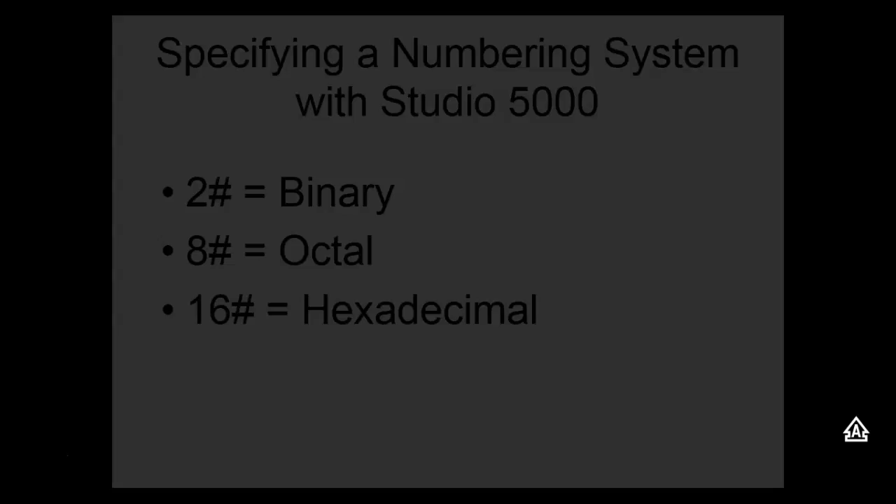We're using small integers, signed integers, these right here. So this is an 8-bit number, so that means we get ranges from minus 128 to 127.

We have integers, signed integers. So int is a signed integer. This is 16 bits, so we get numbers from minus 32,768 to 32,767.

And this is the guy right here. RSLogix 500 called it a long word, but this bit right here, this is a 32-bit signed number, which means we can represent signed numbers from minus 2,147,483,648 to the same number minus 1. And why do we have one less positive number than we got negative? 0 eats up one of your positive slots.

So this is what it stands for. And if you watch videos, they say that's a DINT, that's an INT, that's a SINT - that's what they're going to call it if you look at videos when they talk about these numbers. So by default, it's going to choose what you did.

Then we have real numbers. Real numbers are signed numbers. So this is a 32-bit number, but it uses exponents. So why do we get more right here? Well, these are exponents - you have so many of the bits. So bit 32 is the sign bit, then you have the whole number, and then you have the exponent that you raise that whole number up to. That's why we can get such big numbers with real numbers.

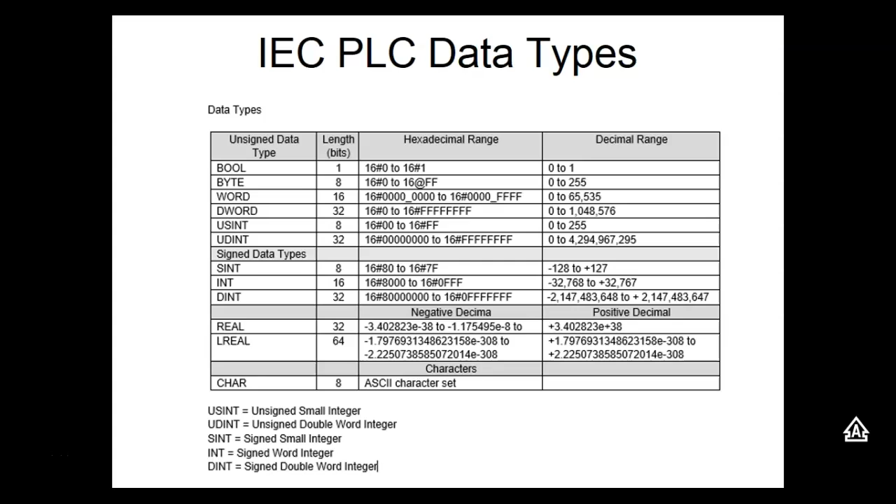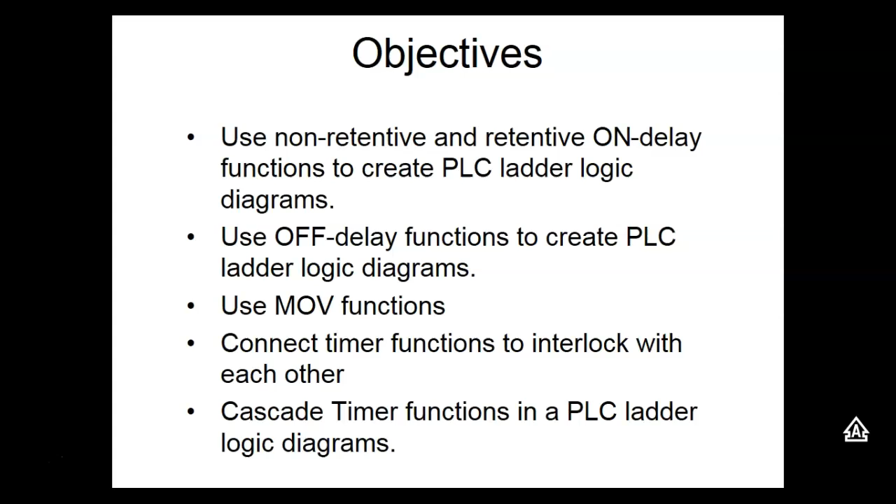So, timers. Use non-retentive and retentive on-delay timer functions to create PLC ladder diagrams. Use off-delay functions. So we're starting right where we left off in PLC 1. We're going to use a move instruction, interlocking timers, and cascade timers. Then we'll look at another thing too.

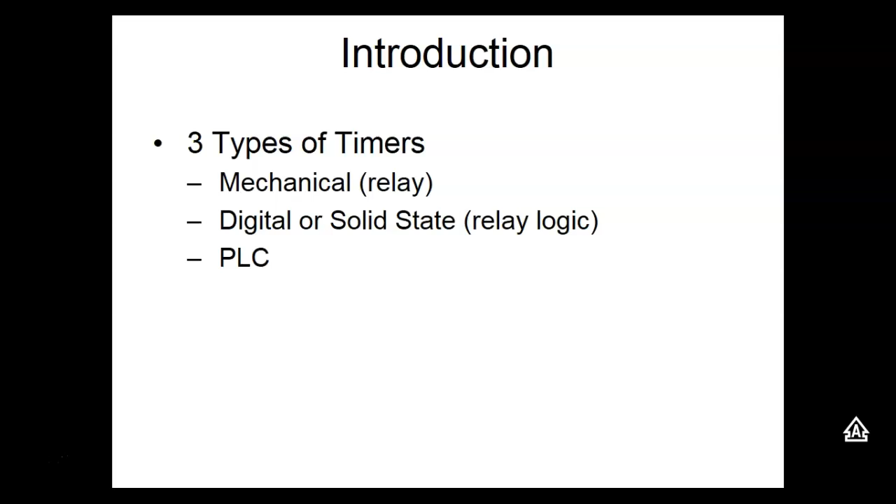So, in motor control, we have three types of timers. We have mechanical or relay timers, we have digital or solid state timers - these are relay logic - and in the PLC we have programs, right? You understand that? So these are some typical relay logic timers. This would be what we call a dash pot timer, because it actually has two diaphragms in there, and you control the flow of how fast it moves, the fluid from one side to the other.

It's usually got an adjustment right here where you set the time. So it's one of those things where if you want 5 seconds, you got to get a stopwatch out and adjust that screw until you get 5 seconds. So it's not like our PLC timer where we can do that.

Then we have the electronic timers. Normally you can set the time with a knob, but it's still not exactly accurate. And then we have programmable timers where you can make them off delay or on delay. I don't know if y'all played around with one of those in motor controls or not. I know you will in the sensor class.

So categories, we have on delay timers and off delay timers. Everybody okay there?

These are relay logic timers. In relay logic, the coil does not define the timer. The coil is just a coil. What defines what type of timer it is, is what contacts we use inside the relay logic.

So we're looking at which way the arrow points. If the arrow points towards the contact, it's an on delay timer. If it points away from it, it's an off delay timer. So this would be a normally open on delay, a normally closed on delay, and your on delay timers are just options.

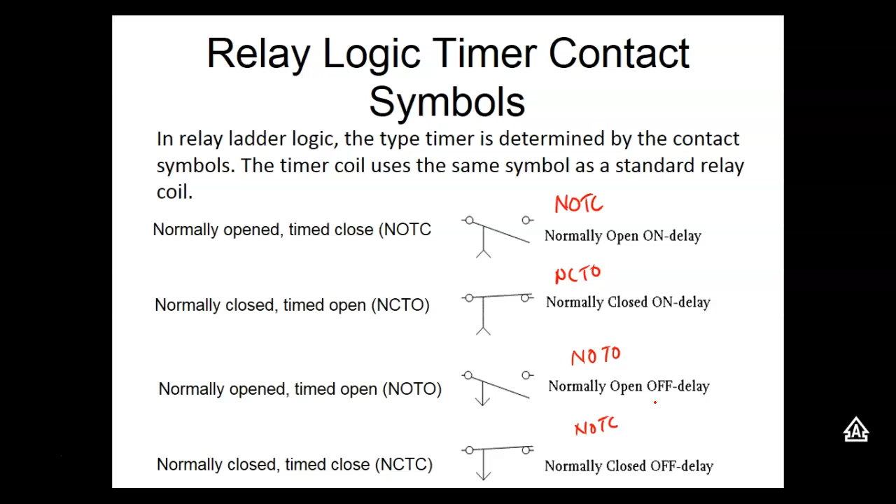And on your off delay timers, they're the same. So this would be normally open, timed open. This would be normally closed, timed closed. So these switch automatically, and then they change states after the time is out.

So this would be relay logic. We just use a coil symbol, and then we give it a name, and then of course we assign it. Normally you don't see 1 and 2 out there - the book does that too. We assign the contacts to the timer. Are we okay?

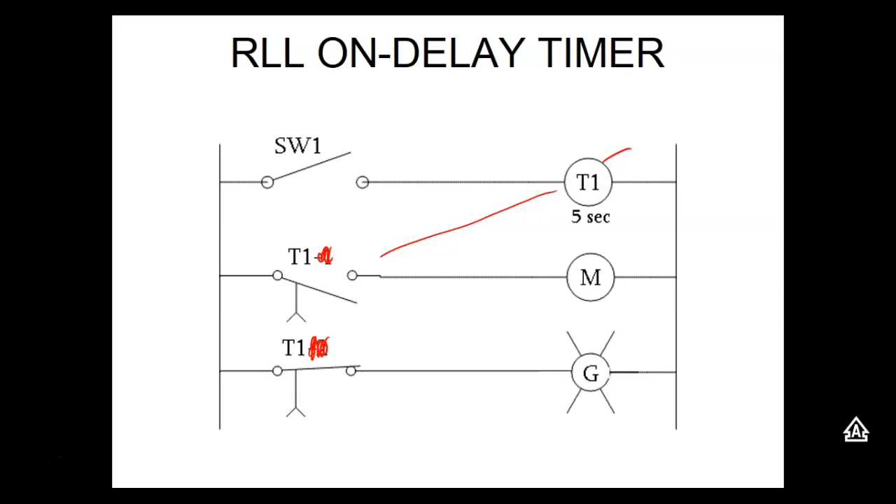Relay logic for an on delay timer. And then we have timer instructions.

So in relay logic, we draw coils, and the coils will be what actually causes the timer to change and move. And then we use those symbols to indicate whether it's an on delay timer or off delay timer. Okay, are we okay?

Same way, we would click on the symbol, right click, come up here, and right click right there, and it's going to say new tag. If you choose new tag, the type is going to be timer. If you set it up inside the tag chart, over there where I was changing mine from bin to bool, did y'all see what I was doing? You would come up here and you'd give it a timer.

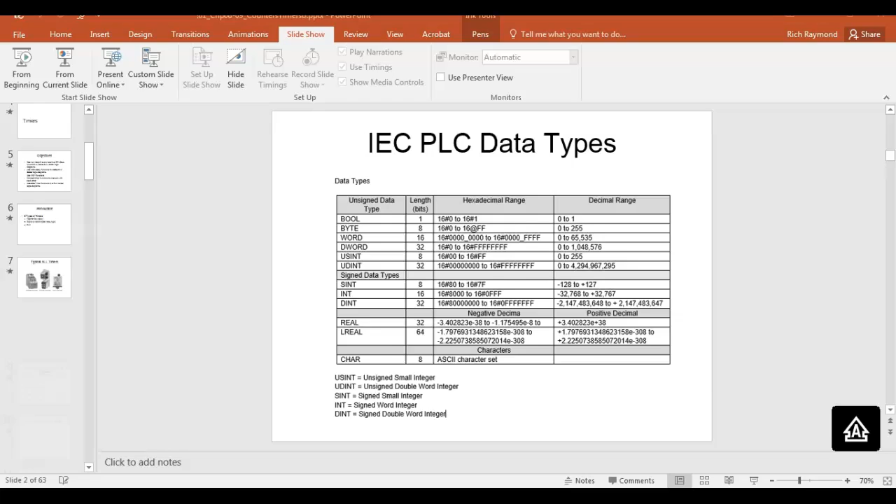I don't know, I think I closed mine out. I should have left mine open. So I'm going to open it up while it comes back, and then we'll open up wiring check 2, and then while it's opening up, I'll come back to my PowerPoint.

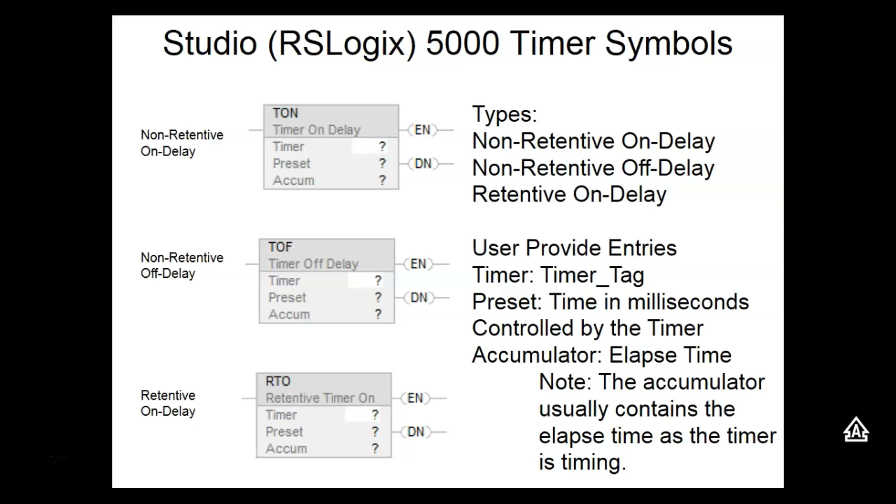Milliseconds, yeah, but once you start programming this thing and you get used to shifting it 3 ways, 10 seconds is 10,000. 5 seconds would be 5,000. And after you play around with it a little while, it becomes basically second nature to you.

So what we would do is over in my main program, my main routine, I'm going to come down here and add a rung. And then we'd put some type of control for our timer. Notice the groups are laid out across the top, so here's our palette.

So here's favorites, this is where you can put anything in there you want to, and I'll show you how to do that later on. Right now these are the defaults, which are the same defaults that we had in RSLogix 500. So we have new rung, down drop, examine if closed, examine if open, output energize, output unlatch, and output latch.

So my timers are here. Here's my time on, see that? What am I going to do now? Well, I'm going to have to give it a name. I'm going to come up here, right click on this, and say what?

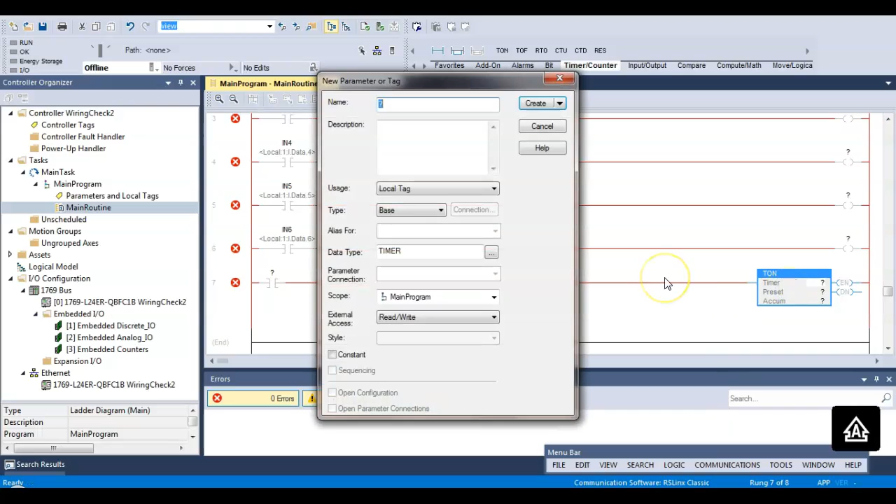New tag. Now what's nice about this is that if you go this route, it automatically chooses the data type for you. If you go over there, then you're going to have to choose that. It's a base tag because it's not referencing an input-output port. And then we give it a name.

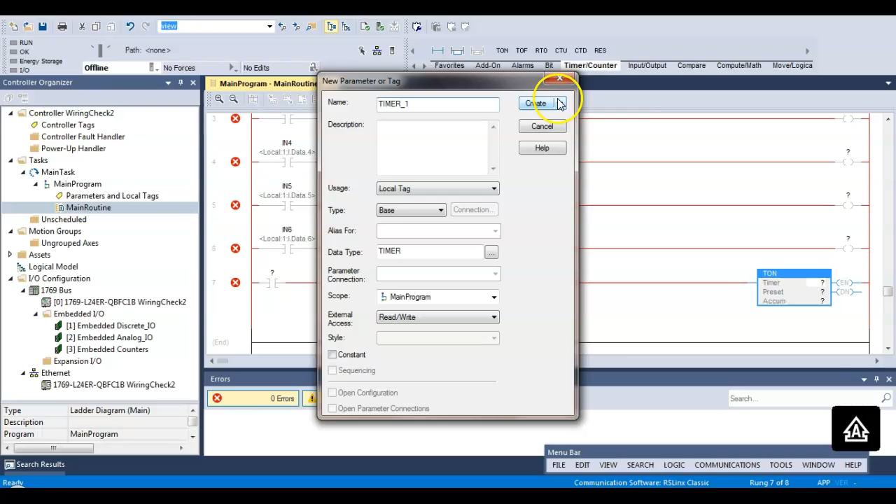By the way, this thing does not allow spaces, so notice when you hit the space bar, it automatically puts an underscore in there for you. Okay, so that's all there is. I'll come up here and say create. And then my timer's got a name.

Preset, we can put the value in there immediately. So if I wanted 10 seconds, I would have to put what? 10,000. Everybody okay? Any problem? Okay.

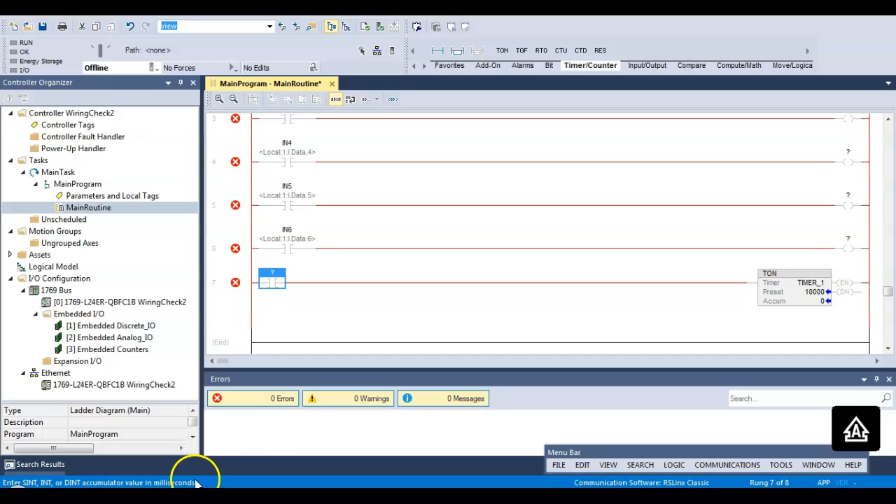Now, how do we address these bits over here? So I'm gonna come up here and add another line, and I'm gonna put a contact over here. So I'm gonna go back to favorites and slide this... okay, I did. So I want to address the done bit.

Well, I'll start typing timer, and it'll start popping it up. Timer_1. Now there's no such thing as slashes here, everything is dots. So I put a dot, and now automatically it gives me options. It says, are you going to address the preset? Well, I'm going to address the done. And that's all we have to do. So there's no slashes, everything's dots. We separate with dots.

In RSLogix 500, if you used a dot, you were talking about 16 bits. Over here, we're using names. So there's my done bit. If I wanted to address the enable bit, I'd use .EN. And if I wanted to address the timer timing, which is just like RSLogix 500, they don't show you that bit that's available to you, but I would come over here and use timer timing.

So I'd come over here and do what? Instead of using that, I would use TT. It lets me do it. Yeah, there we go.

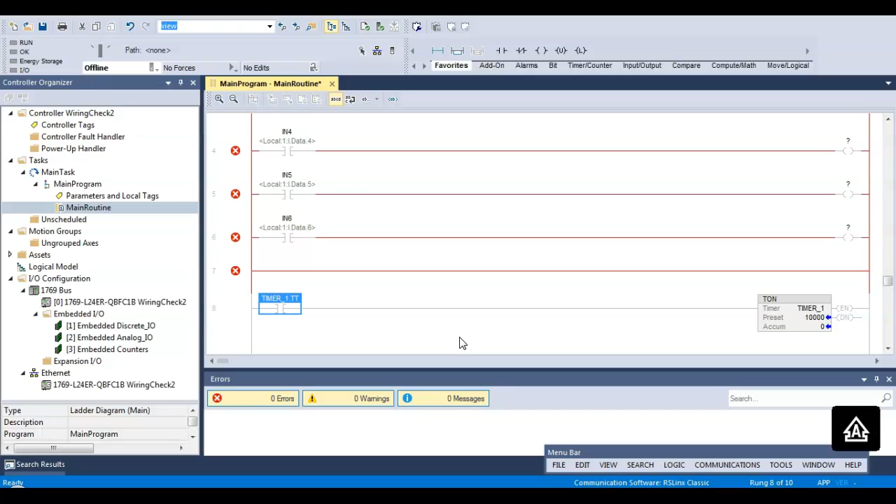Timer timing. So that's the big difference. So it's a lot cleaner. What's nice is that it's using the memory for one time. By default, it's a 32-bit signed number. But if you get up in the billions on your time, so I don't think we'll have any problems, but we can't go above the range that's available to us. Same way for off delay timers, same way for retentive on delay timers.

What's the difference with a retentive on delay timer? It has to be what? Reset. So there's our reset. If I go over to timers, there's our reset instruction right there. So it's exactly the same. You pull it down and you would give it the same name. So if I was going to use a retentive timer, see, ain't that neat? You see what I did? I went up in the title bar and just gave it that 3-letter acronym. I guess they're more mnemonics than acronyms.

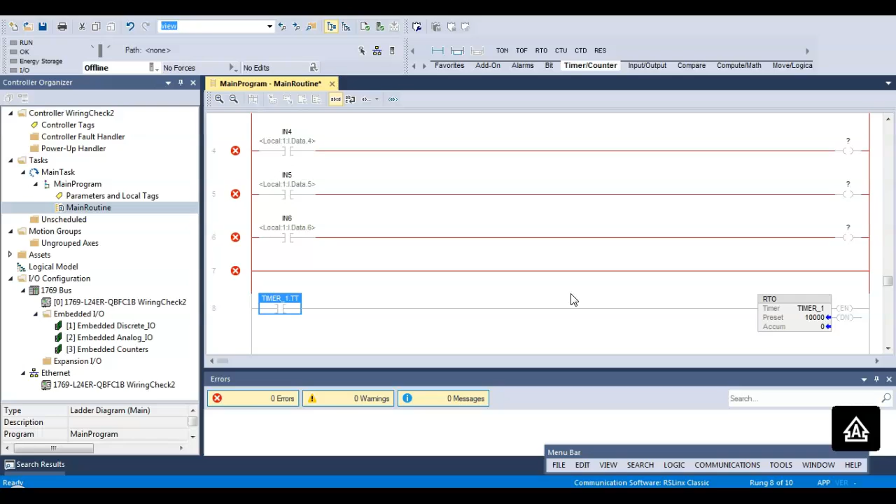We can change it over. And then I would have to come down here and put something that reset the timer. And then over here, I would come into my timers. I pull down reset. And what do we want to reset? We want to reset timer 1. So all I have to do is give it the same name. No, I didn't give it the same name. That's all we do. So as soon as we do that, that's all there is to it.

So now we're dealing strictly with names. This is why in PLC 1 I required y'all to use symbols, to get ready for this. And what's nice is here we deal mostly with tags. We call them tags, they don't call them symbols. But this would be what we call a base tag. So what's the difference between an alias tag and a base tag? Yeah, you're right. So that IN6 is an alias. This is the base tag right here. When we tie a name to a base tag, which is our inputs and outputs, those are called alias tags.

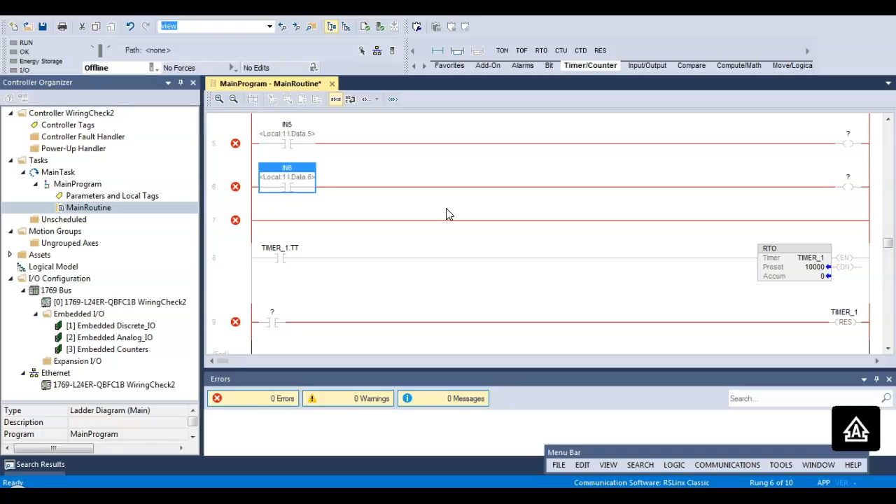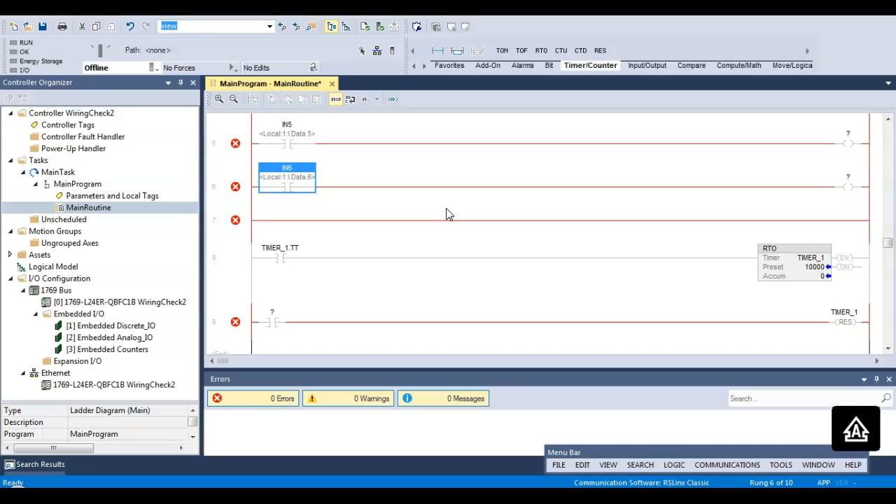So that's timers, guys. Very easy, especially from what we learned from RSLogix 500. You can come directly into this. The only thing you need to know to go to 5000 is what? We don't have to worry about time base, right? Our preset is in milliseconds, and we don't do T4, we just assign it a name. One way we can do it on the fly is right click, and the very top one says Edit Tag. So if I screwed up, I could come back up here and rename that tag. Y'all see that?

Okay, so timers. Any questions on that? Very similar. In fact, it's easier. It looks way more simple than RSLogix. The problem is, RSLogix was okay as long as you used a multiplier of 1. But if you wanted to get those fractional seconds with that time base, you had to do it in here. It's just milliseconds, guys, and that should be second nature to a technician. We teach that back in Intro to Engineering. Normally we wouldn't have 10,000 milliseconds because that's not legal engineering notation, but that's the way it works.

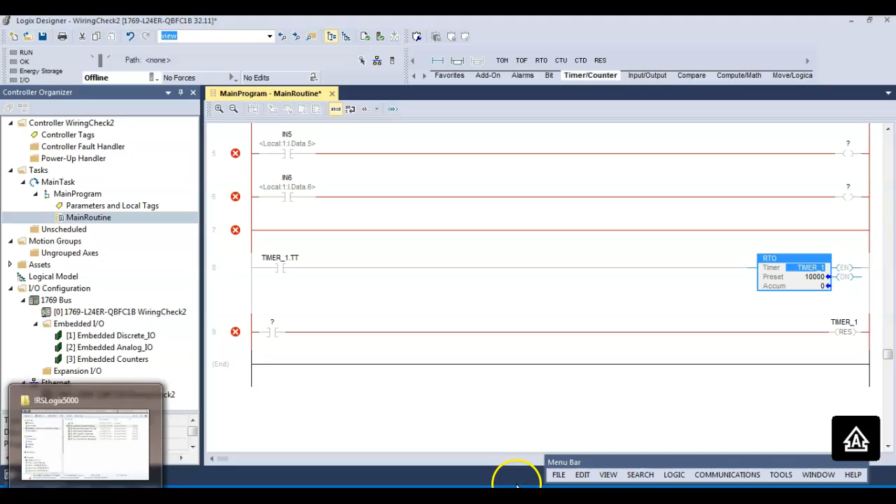So pretty easy. So counters. What about counters? This doesn't have that number thing you got to do, right? We'll see. We'll program one and actually see it.

No C5s, right. We just call it, and you don't have to call it counter one. These tags can be pretty big, so what you need to do is use a tag that basically defines what that timer or that counter does, right? Then when you come back and look at your program, you don't have to figure it out. If you call it timer 1, it's just what? Timer 1. But if it's timing this, then it would make a lot more sense.

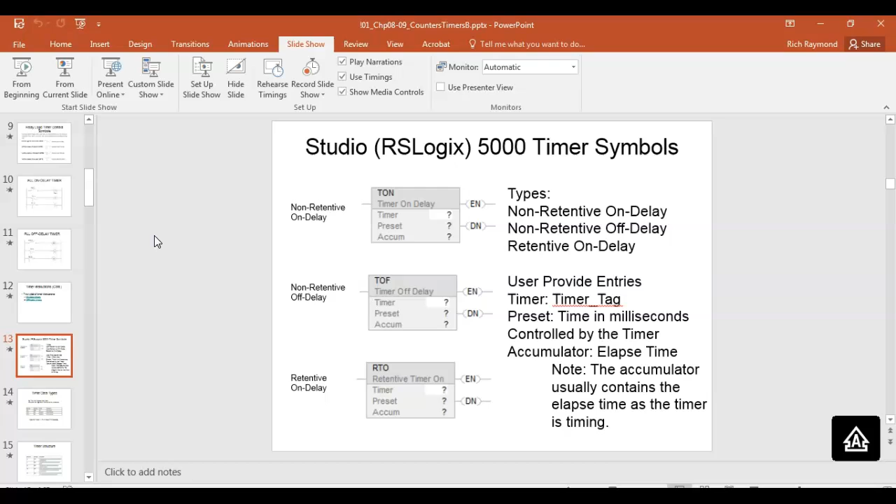But every time, in tags we can't put spaces in there, but it already takes care of that for you. What did it do? It automatically put that underscore in there. In fact, I've seen sometimes they just hit the underscore. So the timer has got to be a what? Now I'm going to check on this.

So we got three addressing modes. Whatever the instruction works on is referred to as an operand. The instruction itself is the operational code. It came from machine language programming. So if it says immediate, that means you enter the number in, just like I did. This came right out of the book, by the way. It says we cannot use any other addressing mode for the preset except immediate addressing. But I don't think that's right. I'll have to go back and read.

So what is immediate addressing? It means that's the number. That 10,000, since I entered that number in that preset register, that was immediate addressing. Immediate means you actually put the operand in the instruction itself. Direct addressing or tag addressing means you get the operand from somewhere else. We assign it a tag, and the tag is kept in the tag table, right? I'm almost sure, I'll check this out and see if we can use tag addressing on this.

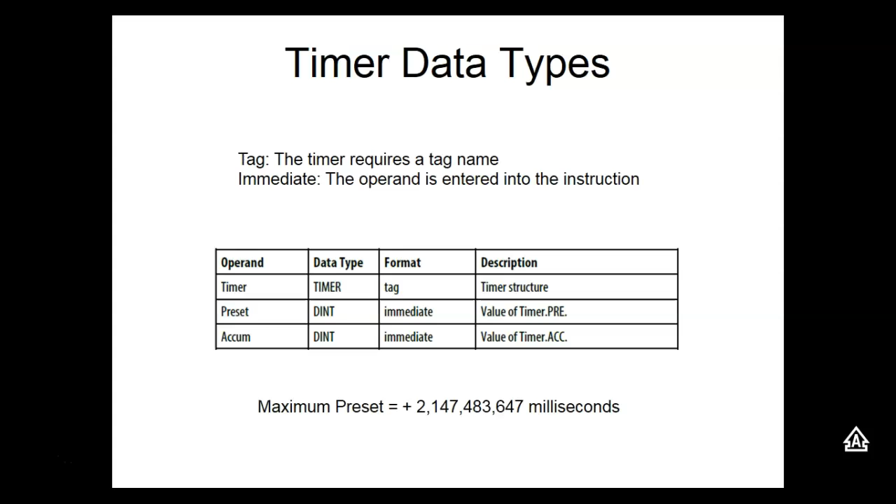So maximum preset is what? 2,147,483,647 milliseconds. That's a lot of milliseconds, isn't it? And what if you needed more time than that? You'd let the done bit on this one do what? Start the next one. That's exactly right.

Here's how we address these things. We put the tag. These are Boolean, single bits. We put the tag .EN if I want to get the enable bit. I put the tag name .TT if I want to get the timing bit. I put the tag name .DN if I want to get the done bit. The preset is a DINT, right? I would just use tag name .PRE, or tag name .ACC if I wanted to access these, not registers, these files, or memory locations. Are we okay here?

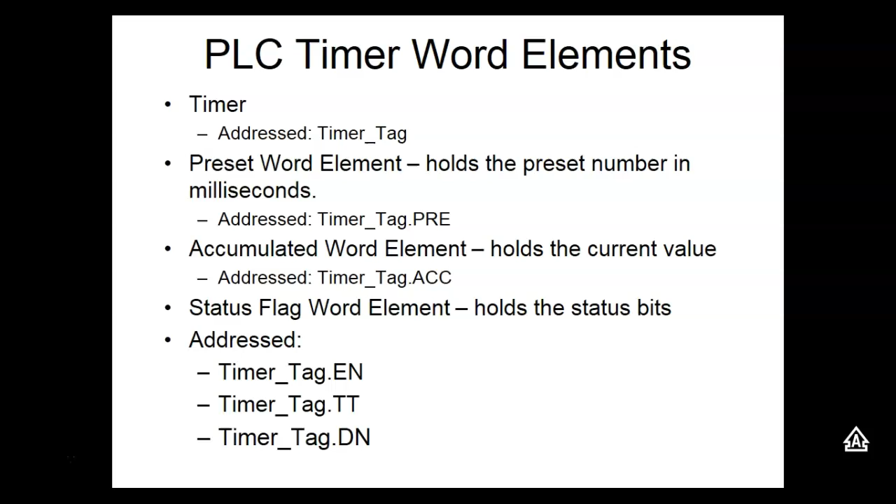So you don't have to worry about when do I use a slash, when do I use a dot, right? Everything is a dot. Well, no, it's not the alias, it's the base tag. None of these are pointing to an IO address. So timer tag is going to be that base tag, where it's local data. So when I put that tag in, that is a base tag. This is an alias.

So an alias points us to an IO port. Everything else is going to be a base tag. Everything. So timer 1 is a base tag. We don't point this to anything else, right? Does that make sense? Good question. That's something very important that we understand. Go ahead. Yeah, a counter's going to use base tag.

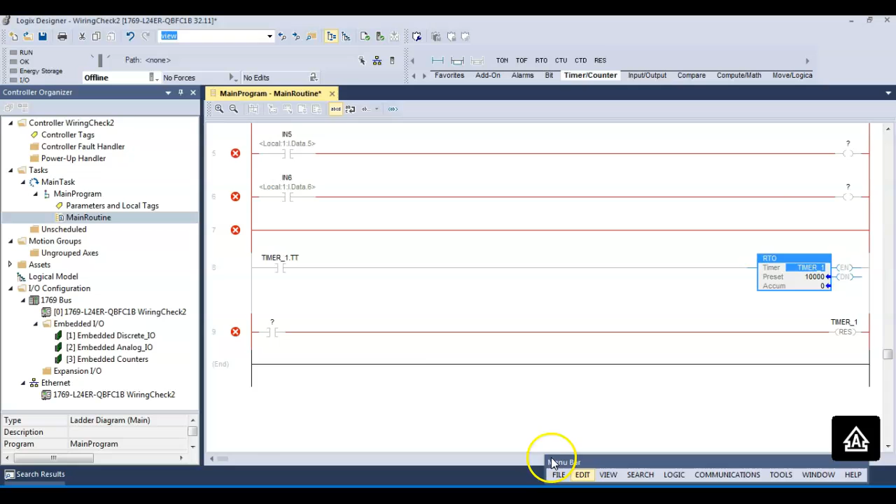Notice when I chose timer, I didn't change base tag down there. So if I'm going to put a counter, the only timer we have to reset is the what? The retentive timer. All your counters you have to reset, just like on the RSLogix 500. I need to finish my program so I can download. Okay, reset. So we'll get rid of it.

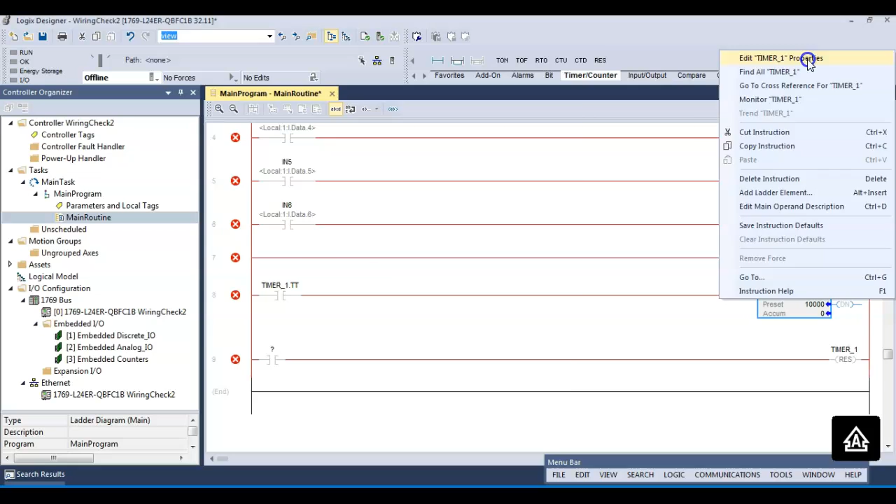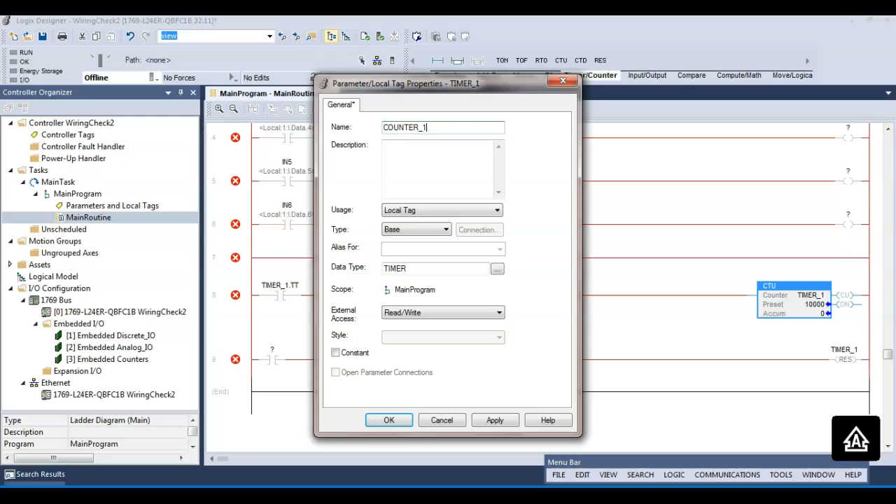So I'm going to come up here and change this to count up. And we'll add it. See the tag? We'll type it in. Base. I'm changing this over to a counter, but it's got all the information I used in there before. So I'm going to change my data type over to a counter.

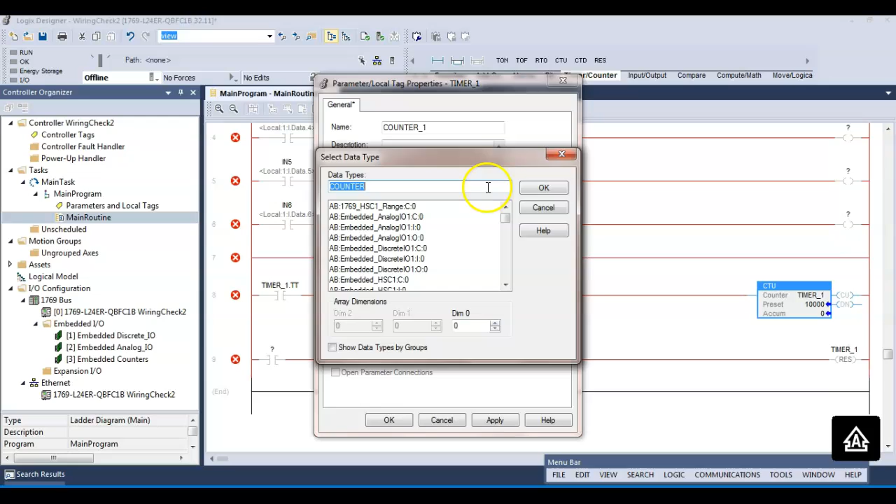By the way, this is the list of all the data types we have. We're not going to get into all of these. If you know what data type it is, timers are going to be a timer data type, you can just start typing it in. You don't have to go through that big long list.

Okay. So now we got an up counter. You'll see how I changed that instruction. It's pretty neat, right? Preset. What are we going to hold in the preset? No, this is a counter. What's our goal? What are we counting to? Right. This is the counter. So what are we counting to?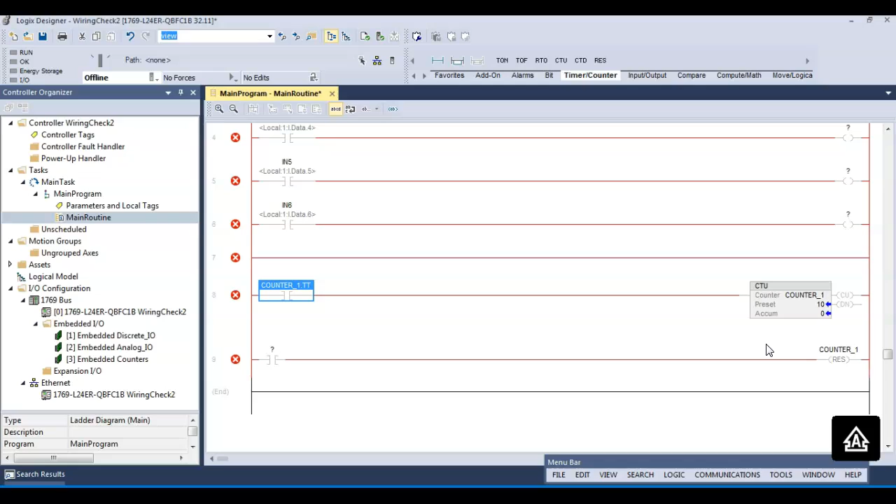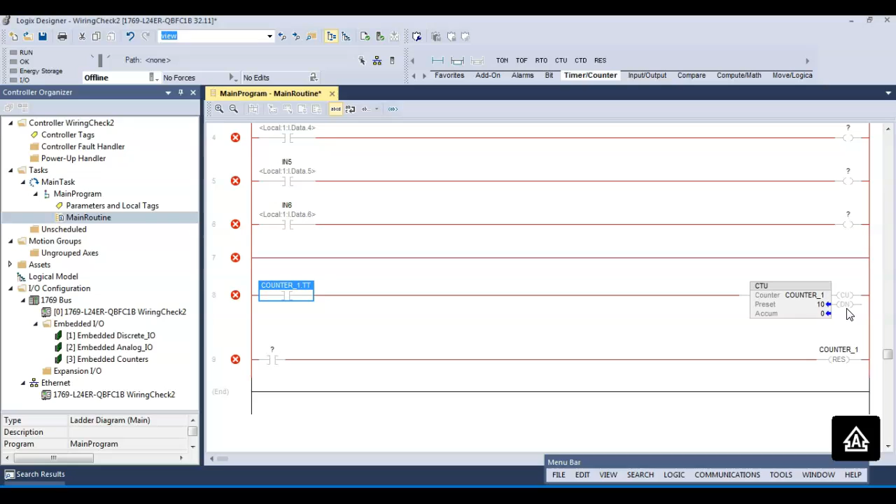We got 2 bits available to us. We have the CU, that's the counter enabled. So as soon as this goes true, every time it goes true, then the counter, so this will pulse with the count, right? And then we have a counter done that tells us when it's through. What happens if we keep counting after it's done? It just keeps counting, right? So what do we have to do to clear out the accumulator? Reset it. Or clear it, by the way. I'm going to show you another instruction.

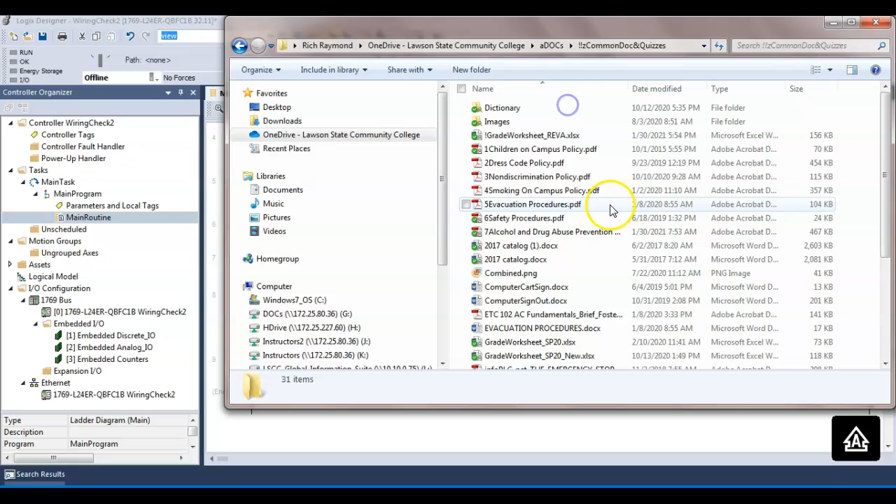So we have an up counter, we have a down counter. By the way, this is the document. So it's up there. And if you want information, I'm here to help you. But what I want you to try to do is look it up in that document, because when you get out there on your own, I'm not going to be there, right? You understand? So if you can come up here and understand this, then this is going to be a step up. So this is on the website, by the way.

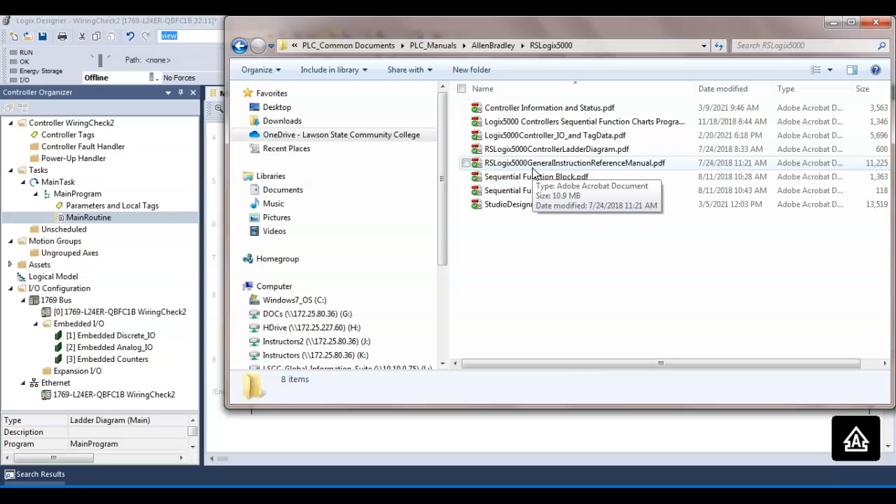So it's called the RS Logix 5000 General Instruction Manual. It's a PDF. You can download this for free if you just type that in there. It's a PDF file.

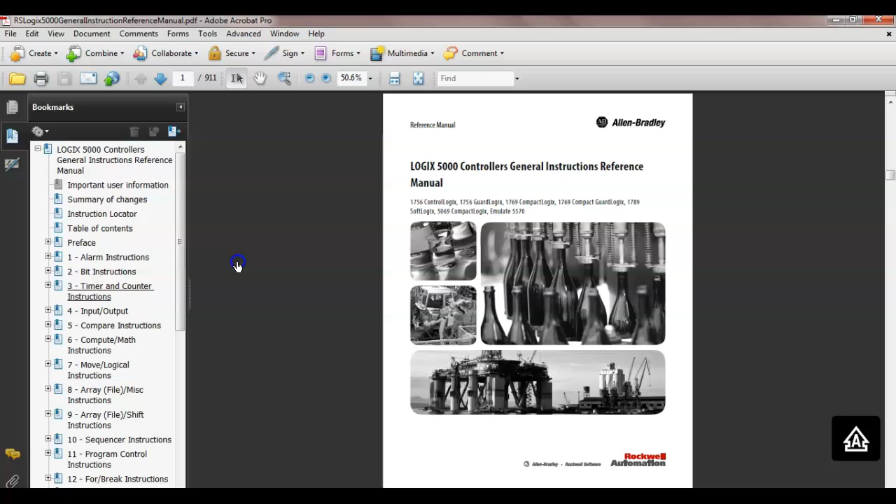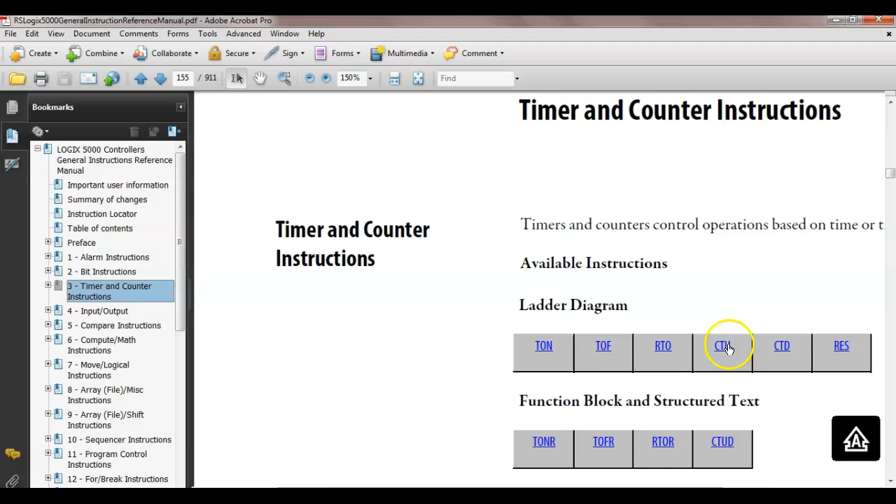It gives us a list over here, so I'm going to go down here to counters. Now here. I'm going to come up here and blow this up quite a bit. By the way, it gives you all the function block diagrams too. This is ladder, so we have an on delay timer, an off delay timer, a retentive timer, count up, count down, and there's our reset. So if you wanted to read what these instructions do, they're all linked. So I can come up here, and it'll take you directly to that section only.

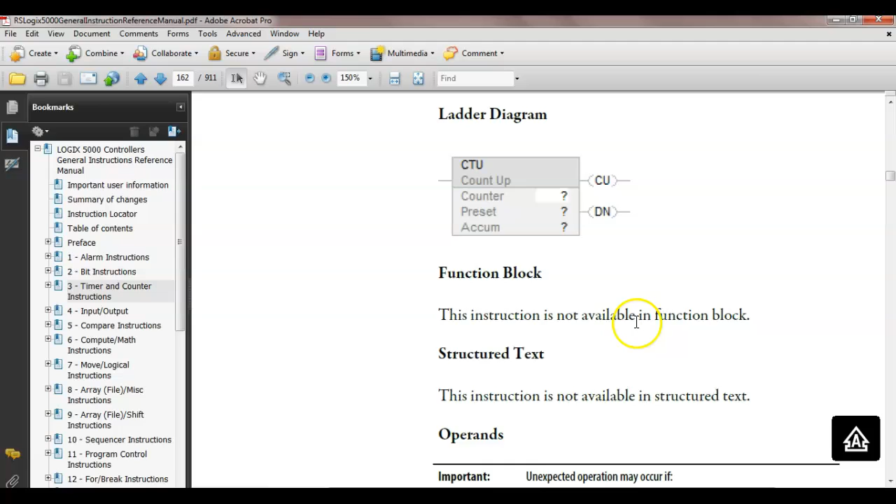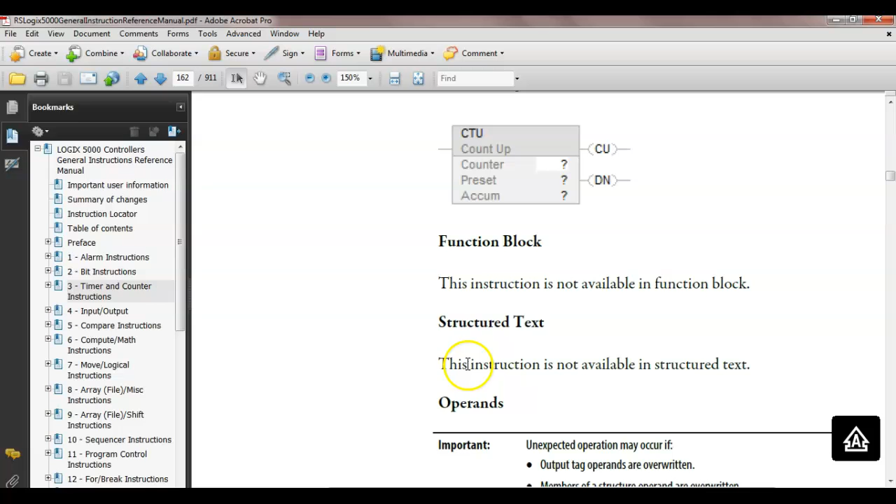So this is up counter. So this is not available in what? Yeah, so you would have to come up and figure out the code for that. And it's not available in structured text. It is available in ladder. It tells us that our counter is going to be a tag. It's going to be a base tag. It tells us our preset is going to be a DINT. It's a 32-bit signed number, right?

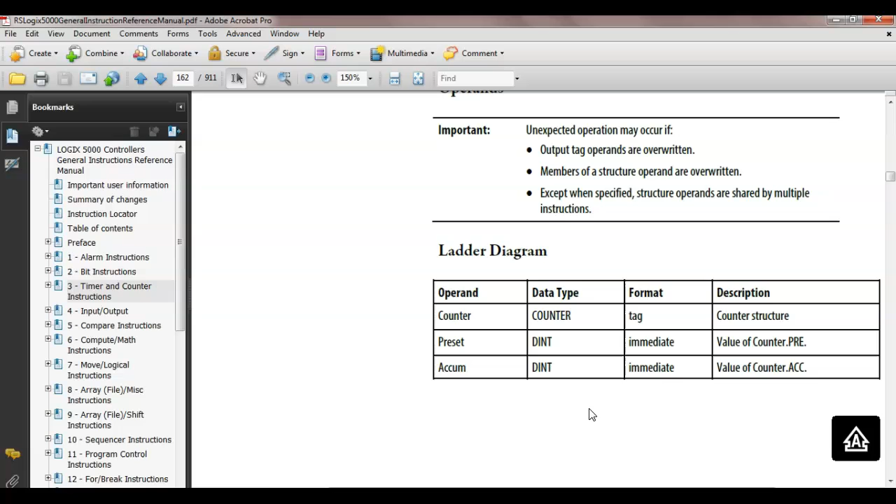It says immediate address. It says counter name, what? Dot preset. And our accumulator, we can come up here. It says immediate address. And this is going to be the number. That's going to be true. And then accumulator. Are we okay there? Any questions on that? It says this is all that's available to us.

So counter name .CU, that would be the count up, anytime the counter is enabled. Counter name .DN, that would be our done bit. Counter name .OV, that would be our overflow. What do we mean by overflow? It means we've exceeded that 2 billion number. If you try to make your counter go past that much, and I can't imagine anybody that would do that, this would go true.

And of course, if that went true, then probably what would you do? Enable another counter, right? And let it start counting from there. So that's the only way you cascade them. Here you would start the other counter if it had an overflow. That makes sense? Yeah, so you'd say, as soon as the overflow went true, you'd stop this counter, and then you'd start another counter. And then you'd have an instruction where you just added both of them together, right? Of course, you'd have to use a real number on that, because you already overflowed the signed number.

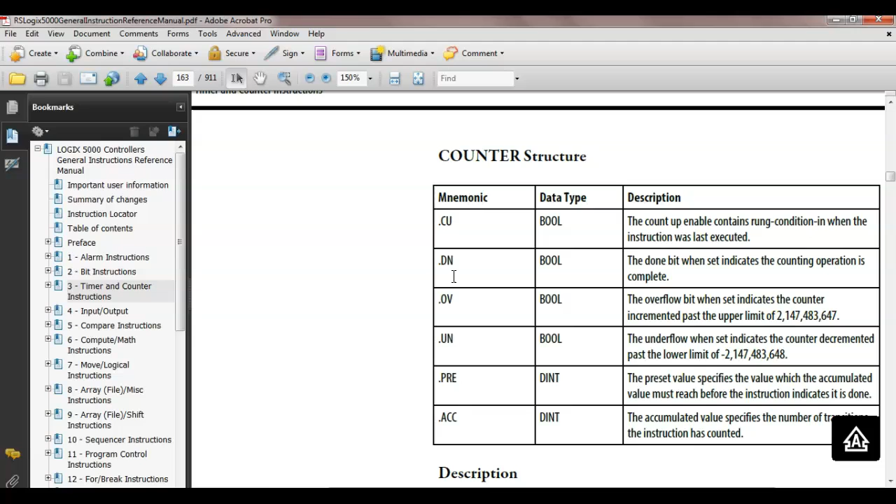This is underflow, so this would be for subtraction. So if we exceed the negative 2 billion, if we exceed that, then this would be underflow. So this would be for up counters, this would be for down counters. Then the preset and the accumulator. Everybody okay there? This is right out of the document. This is in my PowerPoint.

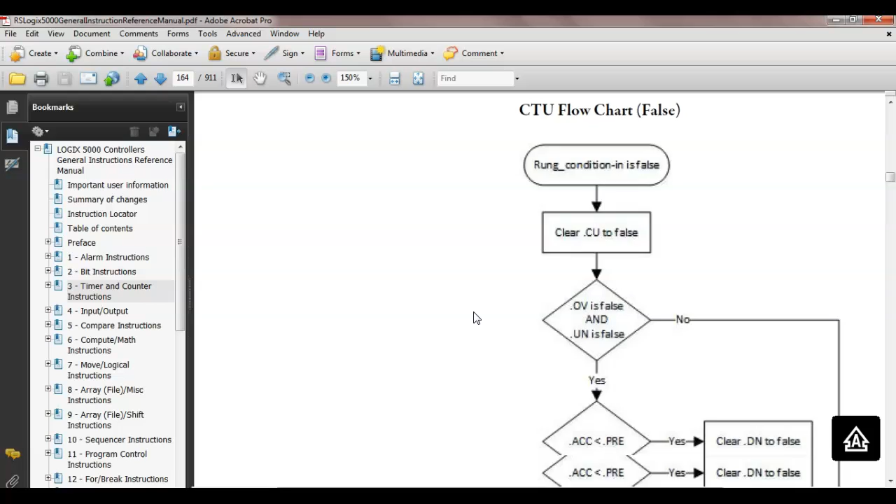And sometimes it'll actually give you a little... that shows you the flow chart, which I very seldom use. And then they usually give you an example. So you'll see a bunch of these where I've cut and pasted them right out of here and put them in the chart.

This is two off-delay timers. Everybody okay here? This is in the text. By the way, almost everything that we're going over, we could read it in the textbook. We would just ignore what? The T4 file, right? You understand. But the way it reacts and what the preset does and what the accumulator does, those are the same. And we would ignore the what? The time base.

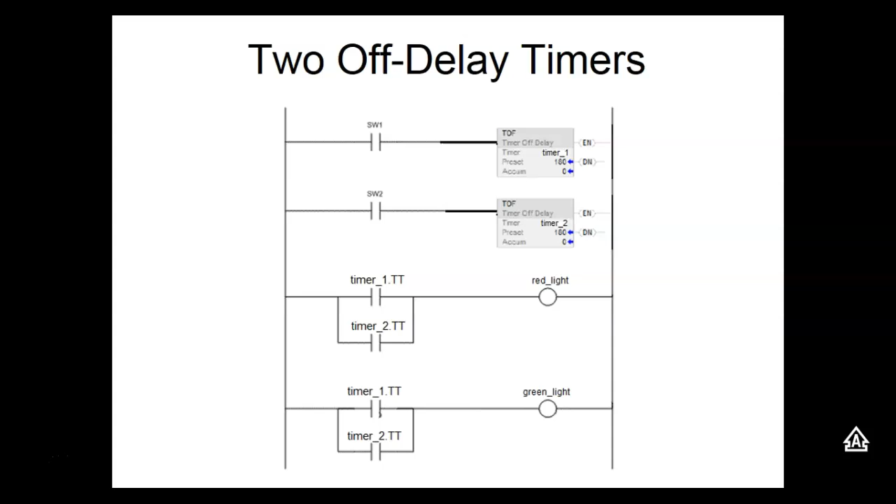Reset. Everybody okay on the retentive timer? Questions? This is just retentive timer. The retentive timers have to be what? Reset. And what you do is you just give it the same tag of the timer you want to reset, right? Everybody okay there?

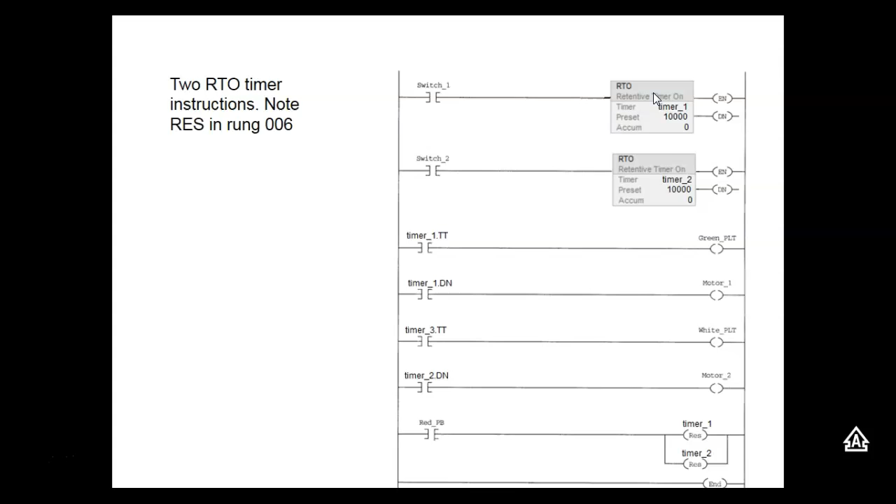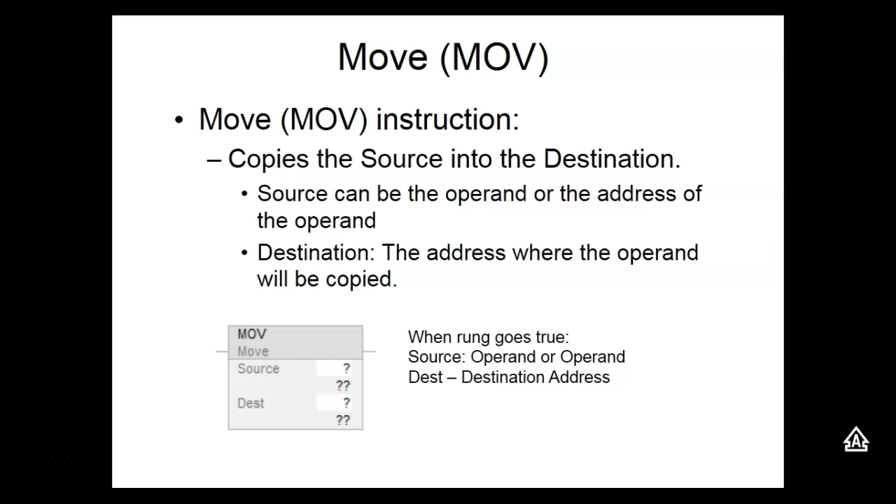Move instructions. This is probably the most powerful instruction we've got available to us. Copies the source into the destination. Source can be an operand or an address of an operand. The destination is the address where you want to place the operand. These are the numbers that are available to you. By the way, whatever your source is, it'll automatically choose the same number system for your destination, right?

This can be immediate, or it can be a tag. This down here, the destination has to be a tag. Everybody understand that? Yes or no? We okay? So that's the way I should have shown you that too.

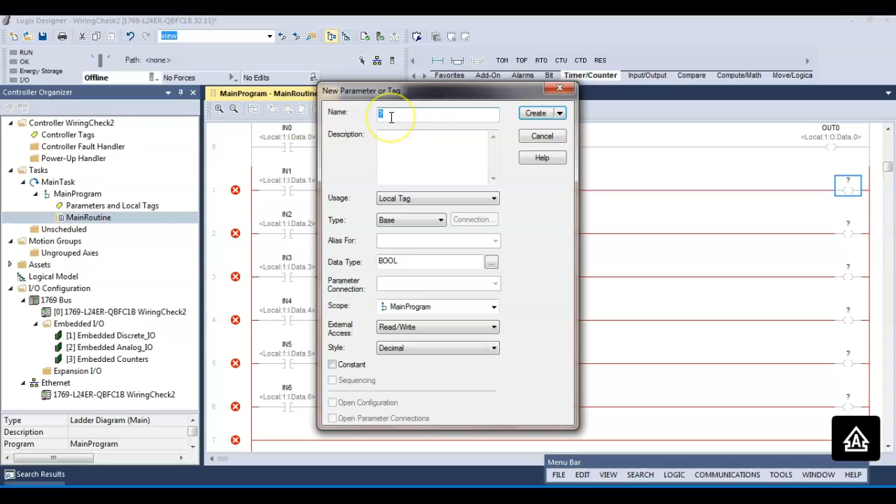So I'm gonna come over here on this, and I want to make this a memory coil. I don't want it like our B3s. Remember the B3s? Those are internal relays. How would I do that for that guy right there? I'm gonna right click on it, new tag, give it a name, make it a base tag, and then hit create. So now that's a memory. So all we do is we don't assign it an alias, right? We just assign it a base tag.

So every coil and every input, well, it'd be hard for an input, but I could come over here now, and I could assign it to what? It'd probably be better if I put it down another coil. So I'll come right there now, and I'll type in memory. And that's all we have to do. So now, this contact is assigned to that memory. That makes sense? Yes or no?

So if we want a memory coil that doesn't have to use an output, and that's what gets a lot of PLC programmers. They think when I put one of these out there, it's got to control an output for some reason, right? But no. In motor controls, you learn about control relays. Control relays means their contacts are never in the power section. They don't leave the control circuit. If they don't leave the control circuit, then they don't need to use an output.

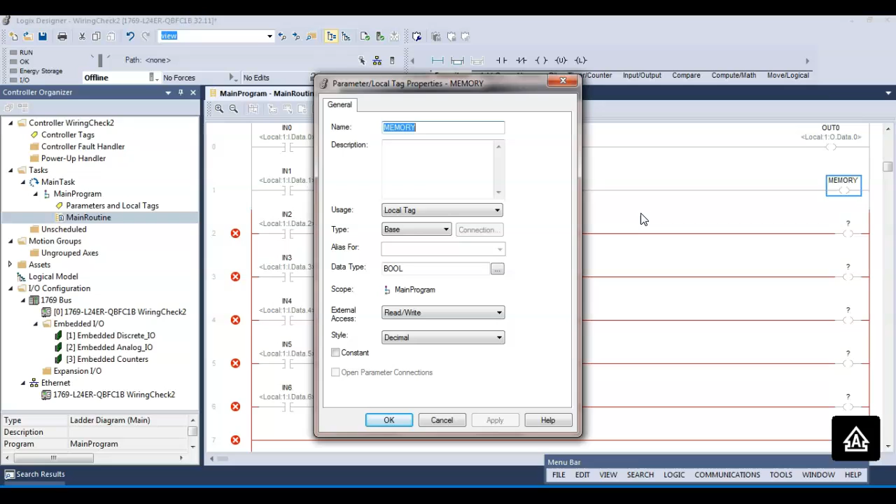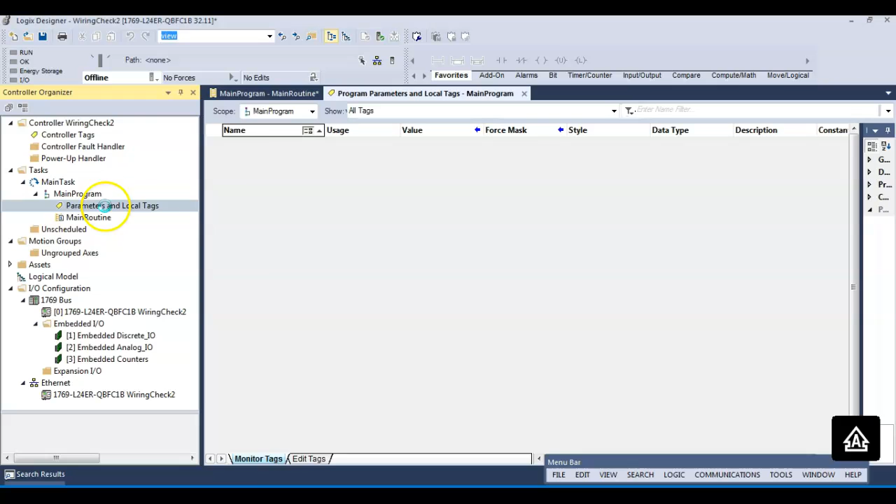But that's something you need to check, especially if you change the instruction. Because if you edit it, a lot of times it'll keep all the information that it automatically chose before. Most programmers, if they know all the stuff about their programs, they'll go ahead and assign the tags automatically. And the advantage of that is once you assign the tags, you're dealing with names instead of numbers.

Well, the problem is if I come down here and make up a tag, let's just say input 10. Notice by default over here it assigns it to a DINT, which is not good. What I've done is I've just assigned 32 bits to one input. So what we'd have to do is come over here and start typing in BOOL. On new tag, it tries to pick a type of numbering system you use. Here the default is a DINT, right? You have to change it over.

If I left this alone, then this right here would be a base tag. So this is where I would assign it. By the way, all the tags that you've already assigned pop up first, and then you'd have to come down here and find it. So everything is basically the same. This is a good way to do it, but there's a little more you have to know. Notice up here, it didn't assign it a label. But it did choose a single bit data type. You need to do that because if it chooses that DINT, it's going to rip off 32 addresses, and it's not going to do you any good. We'll show you later on what's good about that.

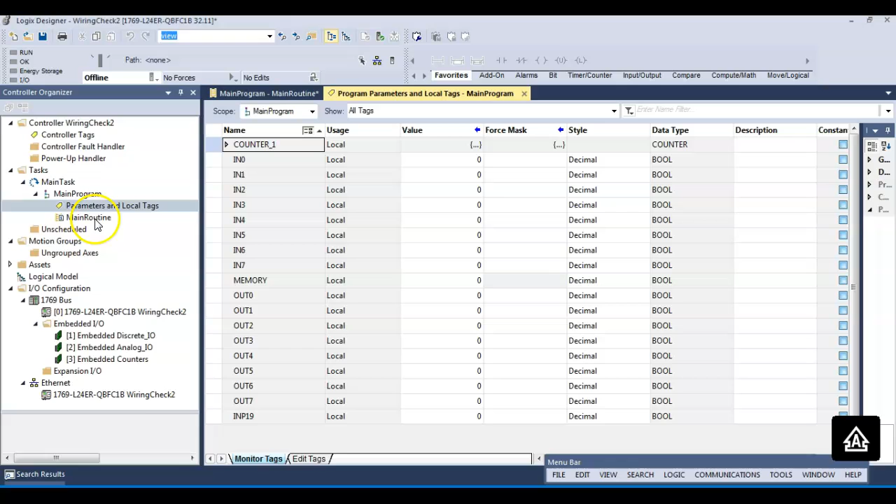So I've got a lot of errors in my code. By the way, you can save errors. On RSLogix 500, it started off with errors, and even though you cleaned them up, they stayed over there, and you had to check it. This one, when you finally get everything set up right, it's not red anymore. So as long as it's red, that means there's something wrong with that rung.

So on RSLogix 500, every time you did something, you had to go up there and run the check. And if the error stayed out there, you needed to get it.

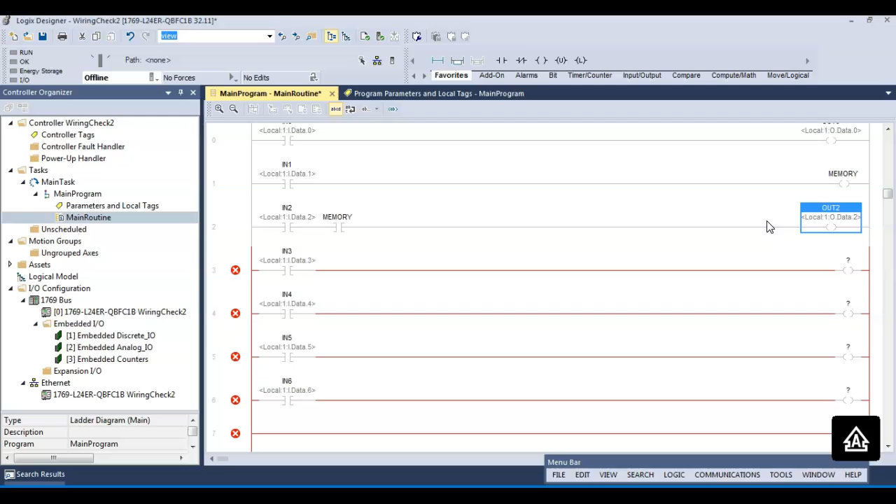What type of counters do we have? Oh, move instructions. So what does the move instruction allow us to do?

It doesn't move, it's copied. That's what they call it in all these programming languages, they call it a move instruction, but it's not technically a move instruction, it's when we copy something into another location. So we can literally take it from one memory location and put it into another, or we can come up here and we can...

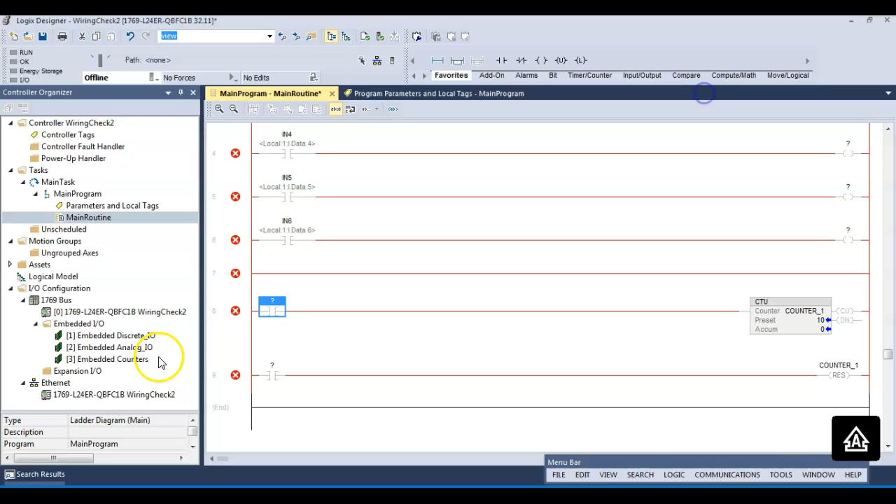So here's my counter. There's something wrong with this. Oh, I can't, there's no such thing as a counter. My tag's wrong. By the way, if we want to do this, we can just delete it. And then allow us to do what? Rename it, right? And what am I missing? Let's see, this would be, I'll just make up one.

And the biggest thing people do is they'll double click on it and they'll start typing stuff. Yeah. And then it'll stay red, and if you got the tags already set up...

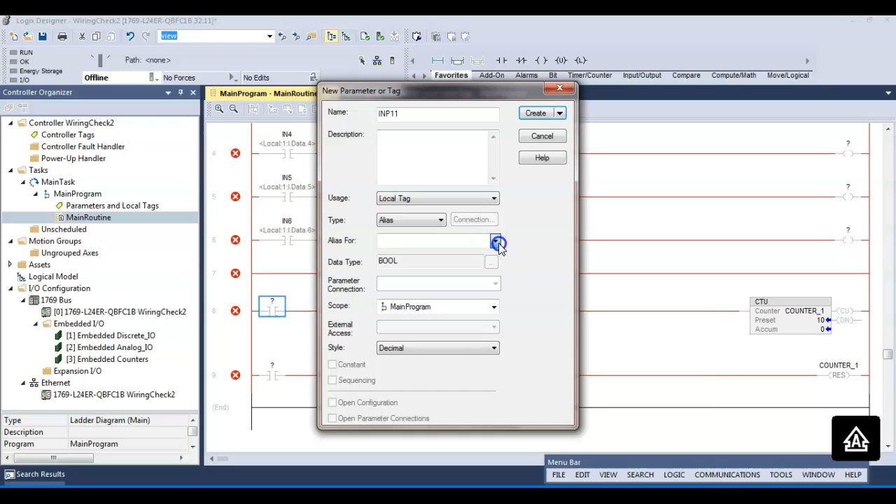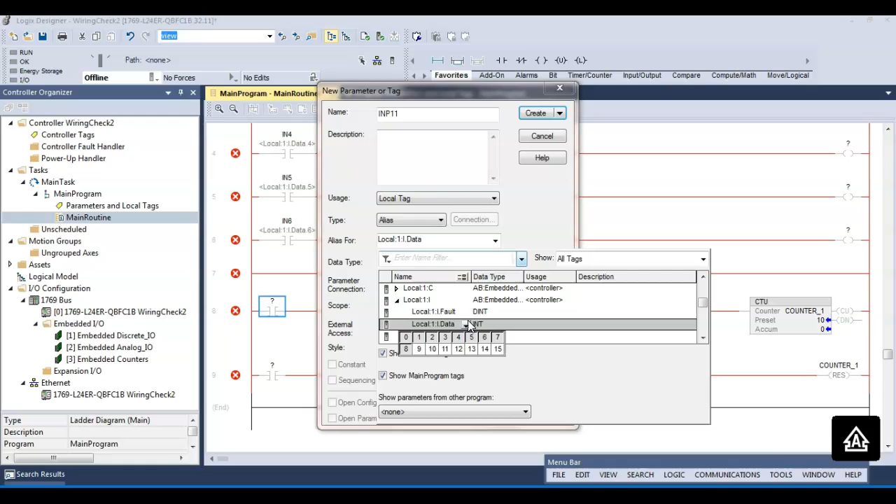What I like about this, now you can assign an input to the same switch, right? You understand that? That would be like a double pole, double throw type switch. But it shows you what you've already used, right? But I could come up here and come back and assign it there, so I can assign it to the same switch. It's just that when it goes through up here, it also does it down there, but it grays out if you...

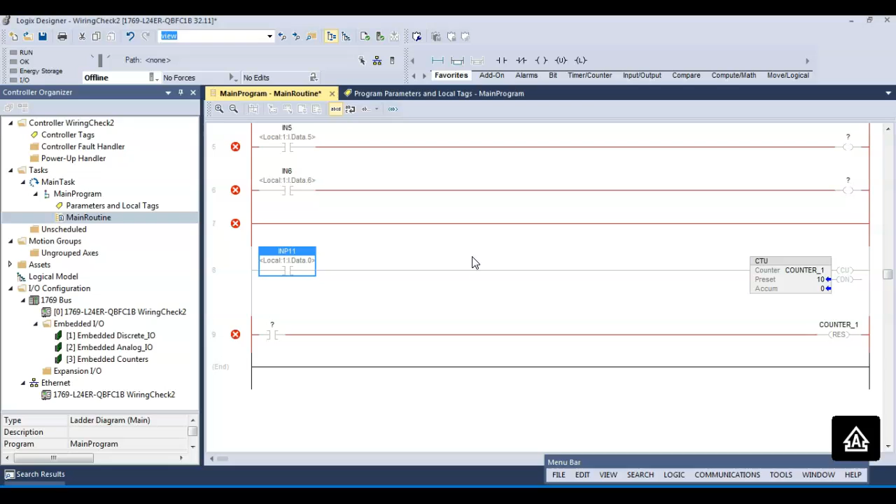By the way, notice it automatically gave it the tag. Did it do that for output? What's that? Did it do that for output? Did it do that?

Yes and no. We can do, when can we duplicate output instructions? So output address, an output energize, you can, and it won't give you an error.

What happened? We demonstrated that in the last class. Some of y'all didn't take it last time. What happened? It ignored the first one because of the way it scanned. So if this said the output was true, and this down here said the output was false, then the output would be false because of the way it scans, right on the thing. So the way it scans and updates the output.

So that's the output that gets updated. So the problem with that, if you duplicate output energizes, it won't give you an error. And why don't they do that? When we first started doing PLCs, the processors were so slow, it would literally miss it.

So what we would do is duplicate this rung. We would duplicate it, the rungs would be exactly the same, no difference, the rung would be exactly the same. And we'd put it multiple times down in the program, and that way it wouldn't miss the input because it had multiple chances to get it. So I guess for that reason, that's why they don't give us errors.

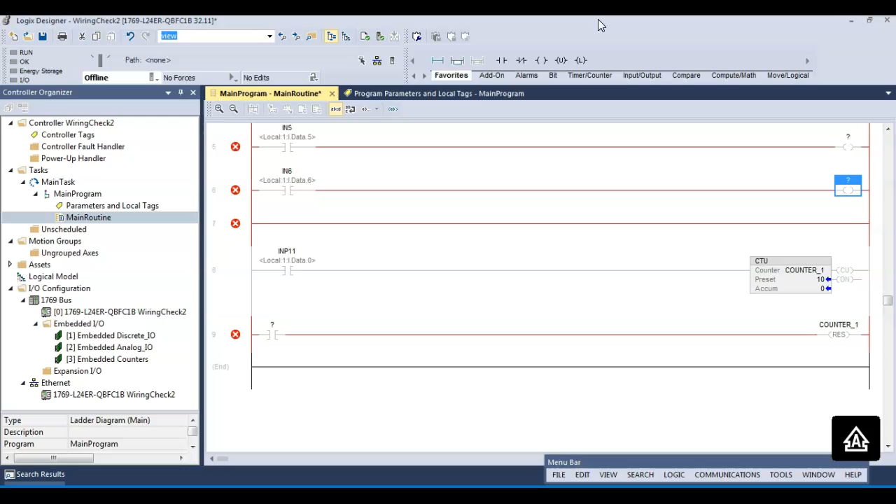What time is it? Oh, we're fixing to get out of here. So let's look at...

So we'll pick up and look at a little more detail on the move instruction. So this is, by the way, these are the programs I actually made, so I need to go back and correct that. Let me bring this up and let y'all see what I did. So I've got this program out there.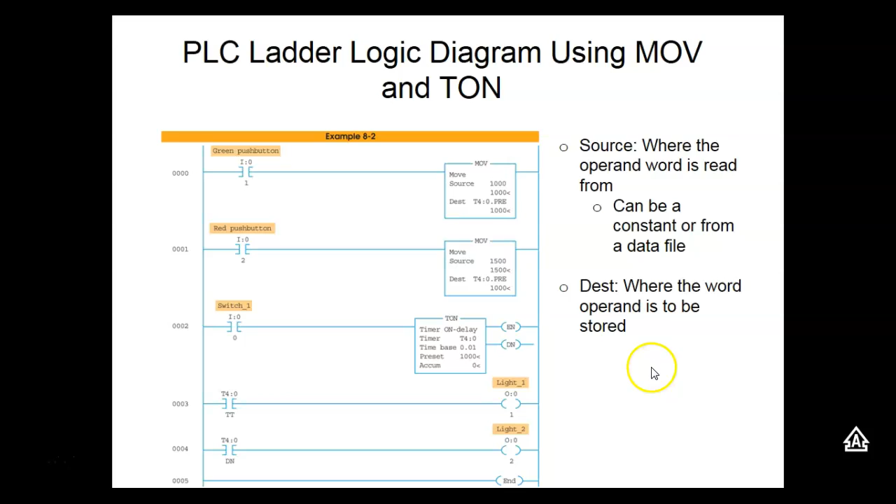But it's still, so that's right, it is immediate because that is the number. So if this was a tag, we'd be pointing this to an address, so that's right, that would be immediate address. So the move instruction, what can we do with the move instruction?

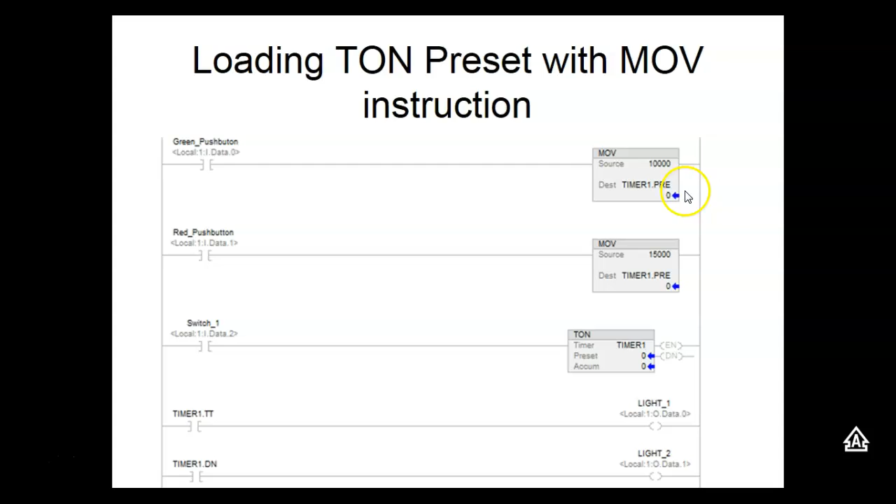We can put anything we want into any place. I'm going to show y'all something new when we come back to class. It says that move instruction though. What's the number of systems that we can use?

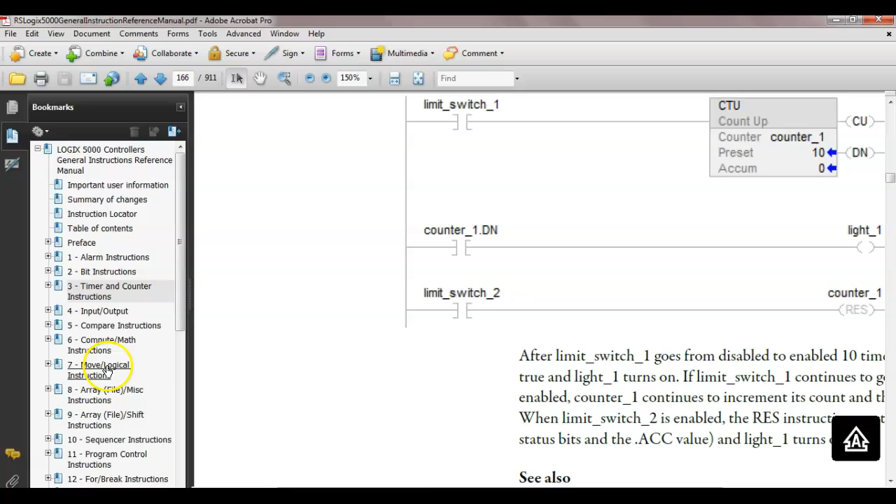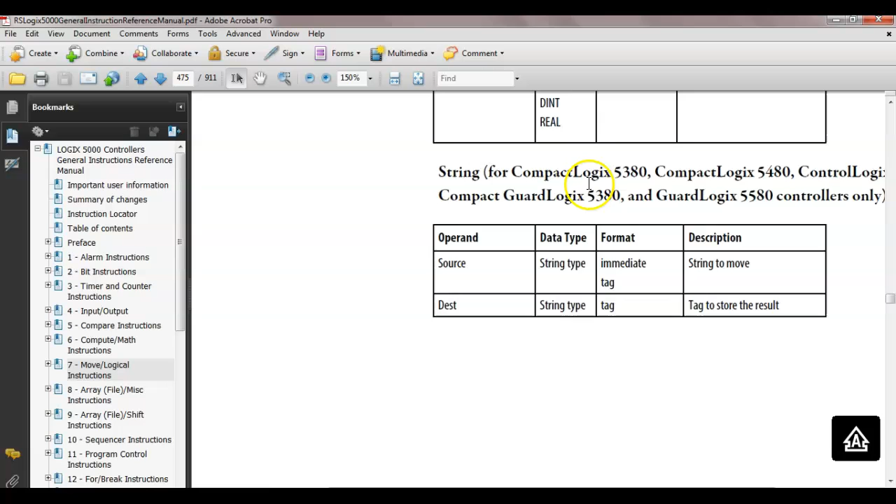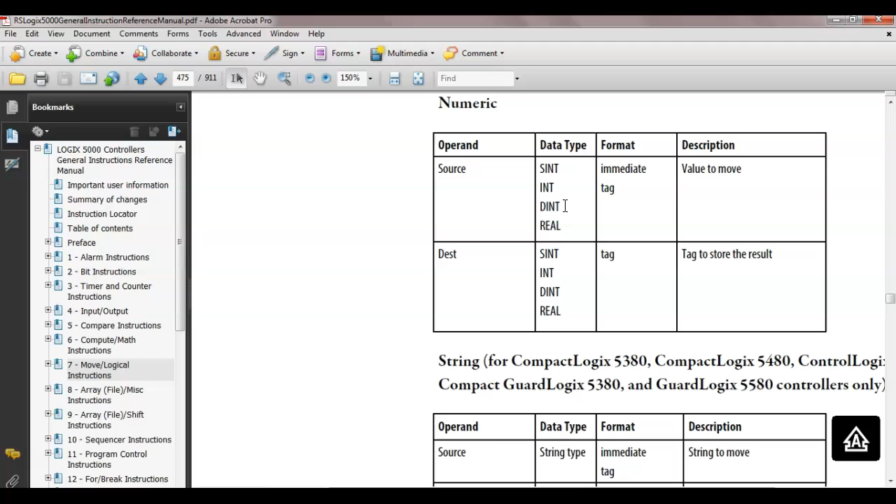So here's move, and here's the move instruction. And it says that we can use any of these number systems. So I can use a small integer, which is an 8-bit signed number, or I could use a double integer, which is a 32-bit signed number, or I could use a real number, which is a real big number.

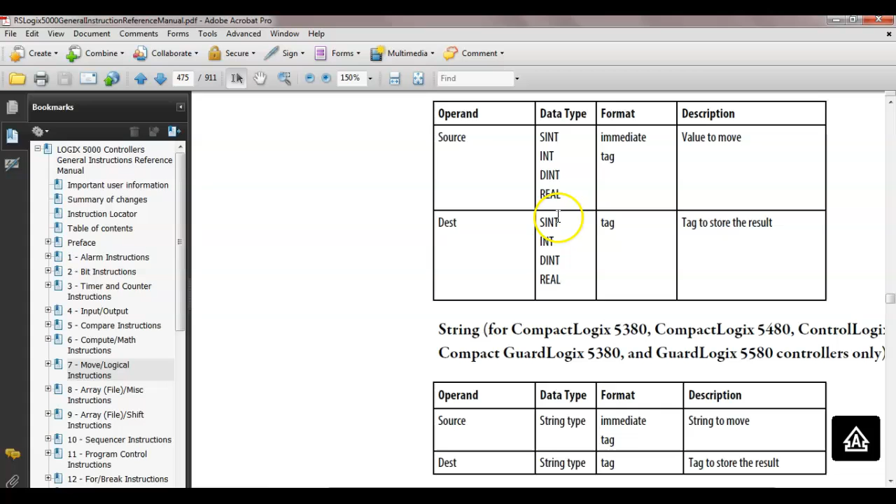Whatever you put in the source, it's going to automatically select for the destination. It says the source can either be immediate or it can be tag addressing. And then, by the way, we can use a string.

Do y'all know what a string is? This is something you need to learn. What's a string? It's a word. So we can literally move a word, a word like 'help.' We can literally put it anywhere we want to, which is pretty neat. So that's what a string character is.

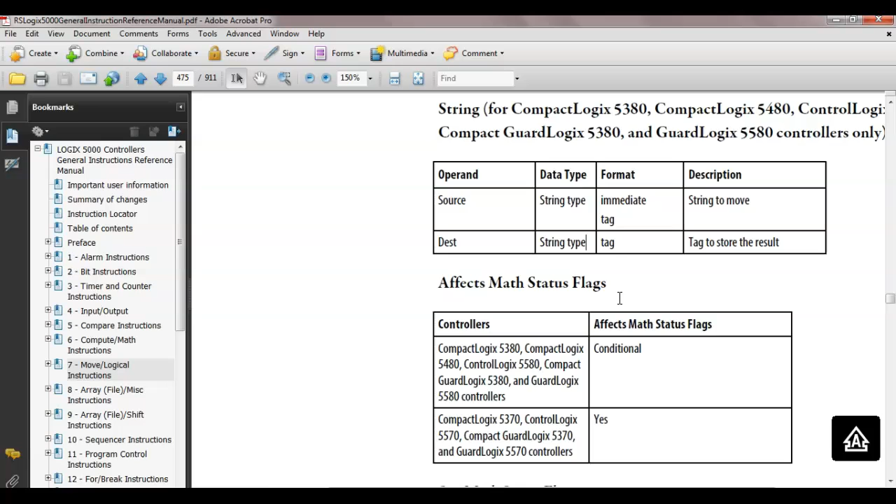So tell me everything we know about up counters. And we'll show y'all next class. We'll put my program on, but we'll look at the down counter and see if it works the same way as that weird thing on what?

RSLogix 500. So remember on RSLogix 500 you had to load the preset with a negative number. There was a way around that too, by the way. I should have showed you how to do that. I might bring it up and show you this move instruction. What we can do with the move instruction is instead of loading the preset, we set the preset to 0, and then we use the move instruction to put a number in the accumulator.

On the RSLogix 500, if I wanted to see a down counter, I could use the move instruction and set the preset to 0 and put like 15 in my accumulator. And then it would go 15, 14, so it counts backwards, but you still have to go 1 past 0. So you have to go to -1 before the done bit.

So yeah, that's what most people would do because it gets confused if you load it with a minus number, right? So what most people would do is put a positive number in the accumulator and let it count down from that. But I'll show y'all that too. I don't think I showed you that.